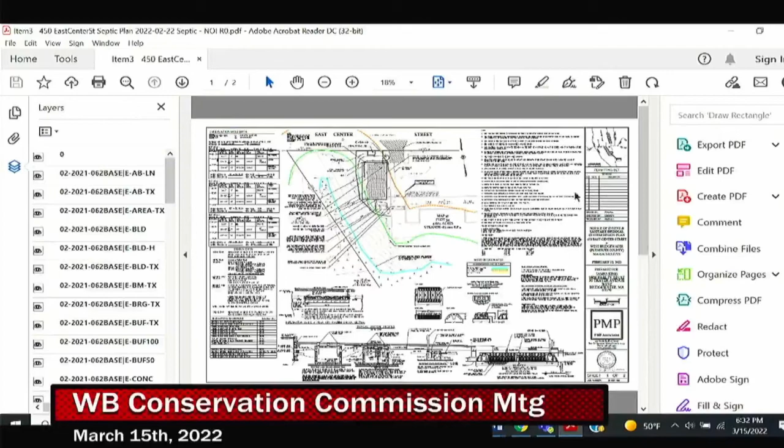Would you like me to proceed with presenting, or do you need me to present it? If you can show it, I can explain. From what I hear, sharing screen is kind of tricky. It's even tricky for me. I have much faith in you, John.

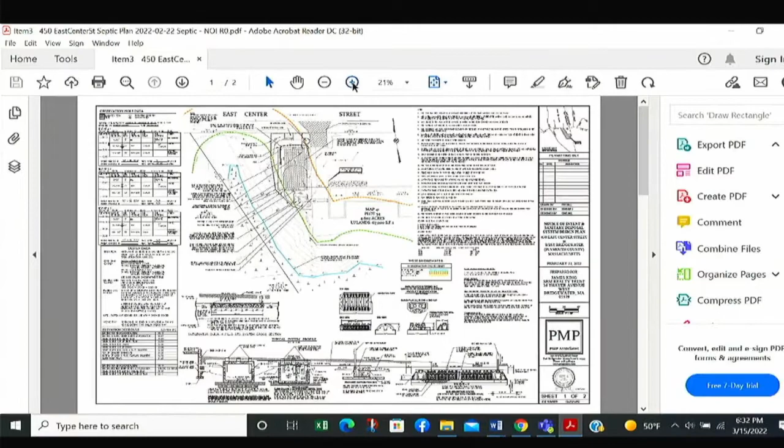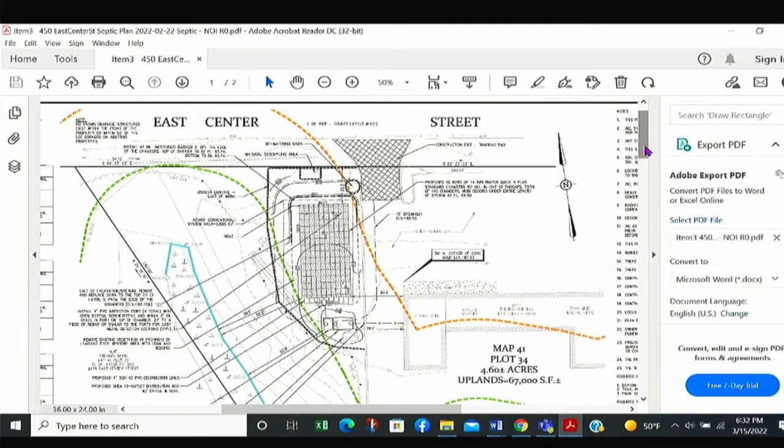Can you see it, Amanda? No, I'm not sharing it, sorry, hold on. I cannot, no. There we go. Perfect. It's all yours. Great, thank you.

My name is Amanda Langer, I'm here with PMP Associates on behalf of James King with SBM Realty to request permission from the commission to replace an existing failed septic system at 450 East Center Street in West Bridgewater. The building is a commercial building with 3 separate tenants at the moment: a general store that's been there forever, an antique store that's only there a few days a week, and a somewhat new cafe, Two Gals Grill. These tenants have long-term leases, so they will be there for a while.

The current system is failing. The owner said he has to pump it probably about every 3 to 4 weeks at the moment. So what we are proposing is to replace the existing septic tank and leaching field with a new leaching field with a geogrid, new distribution box, and a partial poly barrier, and we are going to be able to use the existing grease trap there. There is a little bit of disturbance in the 50-foot buffer, and that is just for earthwork grading purposes, so that we have enough cover over the system to avoid it failing again.

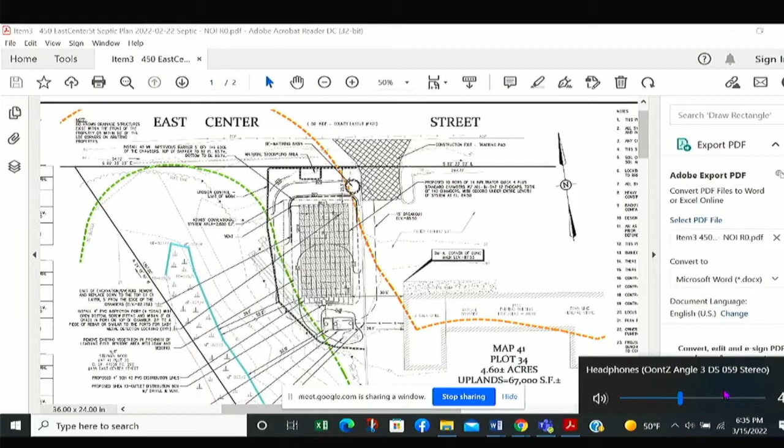Anybody else, comments, questions? I take it all these outbuildings were done long before, within the 50-foot buffer. So the question, Amanda, was the other buildings there, they were done way back and not part of this project. No. But I have no questions.

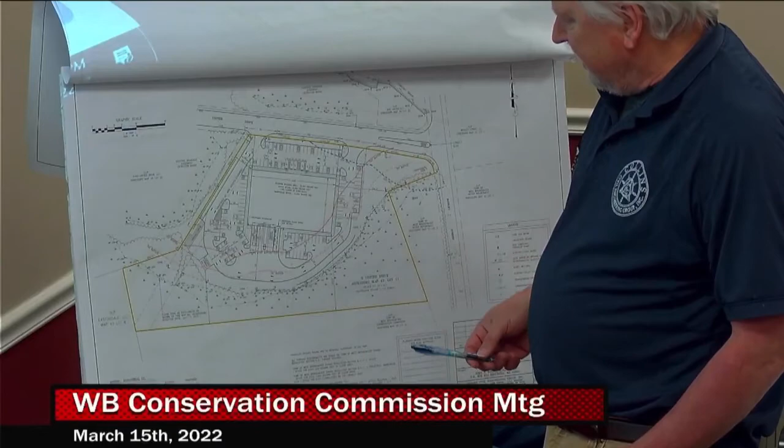We're gonna have an access drive, or an accessory building out here that's 20 by 30. It's gonna be a garage, for storage and maintenance. Nothing hazardous, nothing chemical. These guys are high tech. Things come in, they put it together, they ship it out. There's no manufacturing here, it's all high tech equipment.

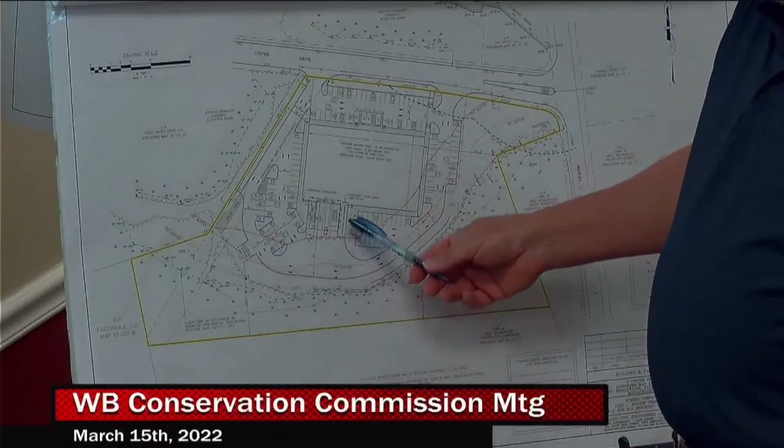We're gonna have a dumpster here, a compactor dumpster, which is outside the 100. So the things that are inside the 100 would be some of the parking. There's a retaining wall here in this dark line, and there's another retaining wall over here outside. There is a gravel drive here for access to the back. There's a basin back here, and there's an outlet pipe back here.

And this shows the proposed sidewalks that have been changed, and access doors. This pretty much is just the layout. There'll be two entrances, and they will both be for ingressing and egressing, so they can come in either way. These are large radiuses, 18-wheelers can make this very easily. The loading docks are full loading docks with a 4-foot foundation shown.

All the grading is going away from the building. I wanted to make sure that there was no puddling or icing up against the building when that happens. So they have 3 loading docks and a trash compactor. This entrance here is going to be a ramp that goes into the building, and we do propose a floor drain. There's going to be a generator over here for power in case they lose it. This floor drain will drain out to an oil water separator, which would drain into a contained vault, which will have to be maintained.

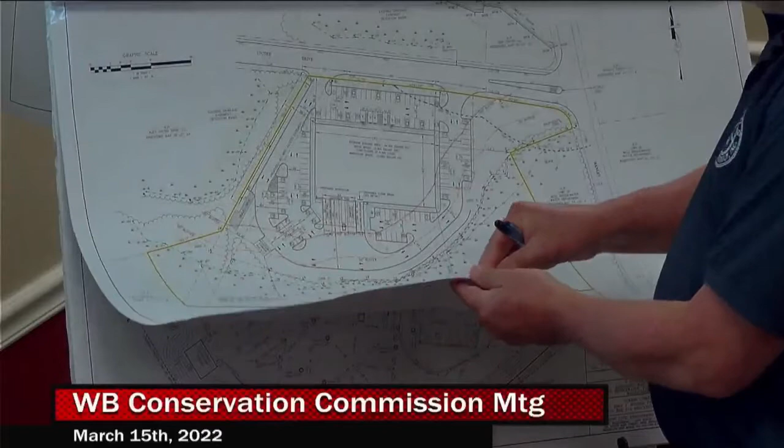Related to what was just talked about, explain again what the purple line is here. Well, the purple line is the limit of work line that was originally accepted by this commission from the granting of the land to the town from Mr. Ronald Snow, which allows work up to the purple line. Yeah, we don't go beyond the purple line. And the purple line's about 2 or 3 feet from the wetland line. The closest that we have, our siltation fence, is 5 feet from the wetland line. So we're gonna have a tiny buffer.

This is just a large scale drawing so you can see a little bit better. It shows the number of parking spaces. I don't show any of the buffer zones on here because it's mostly for layout purposes, to see how traffic's gonna flow, where things are in relationship to the proposed building itself. You can see that these LIs are all landscape islands, and there's quite a few of them.

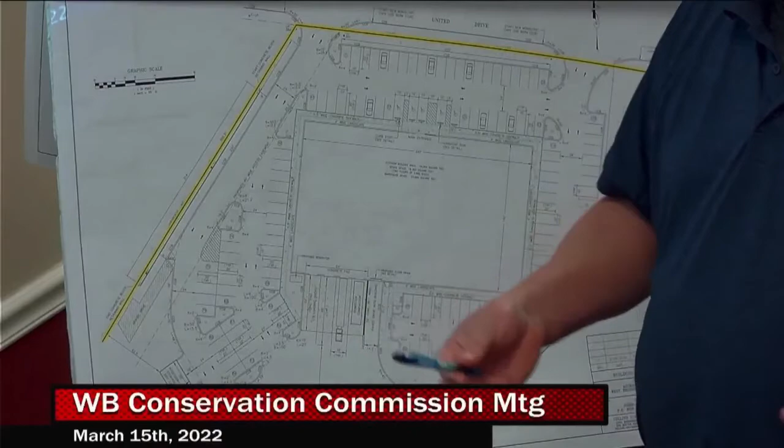We're gonna have snow removal. There's a 10-foot grass strip right along here, all snow removal. This will all be snow removal in here, and this will all be snow removal up here. There's a large amount of area that they could push snow in this area, and once it melts, it'll go through our treatment train. Where is it again? The snow removal is, there's a 10-foot strip here, and then there's a 10-foot strip that comes all the way across here.

And then this is all snow removal down to the retaining wall. And then we also have snow removal all on this side of the parking lot.

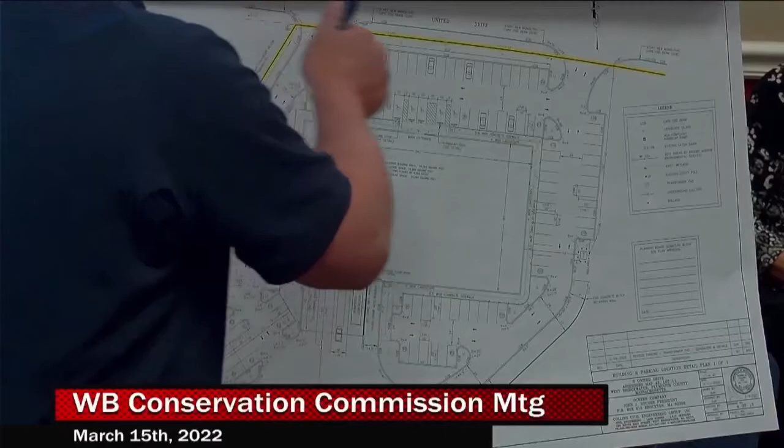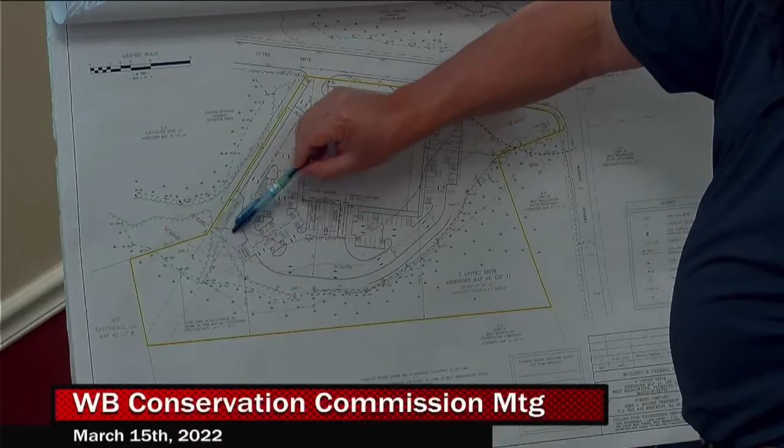How far from the purple line is that? I'll show you on this one, back on the earlier one. So our snow removal is here and here. I'd say the 10 feet is probably another 15 or 20 feet to the purple line from here, probably another 30 or 40 from here at least. Actually, this snow removal is outside the 50 right here. This is just inside the 50, so it's probably at least 15 feet or so.

They're not planning on using any chemical treatment for ice? No, there's an operation and maintenance plan required that forbids that, so no chemical treatment. No salt? No salt. What are you gonna do, molasses? Yeah, sand it.

Sand it. Were these lines, the purple, the 50-foot and everything, were you, when we said something about working up to the purple, is this before we knew what was going in there? That we said it was okay? This was an agreement between Mr. Snell and this commission. But we didn't know anything what was designed going in there. Nobody had anything designed, nothing.

So we didn't know 50-foot, 100-foot, what was gonna be in it or anything like that? No. So this is just based on the agreement that you made with Mr. Snell. The design was based on that. So there was no design prior to that. In fact, I came in a little later on the project. So really, the design started maybe a month ago, tops.

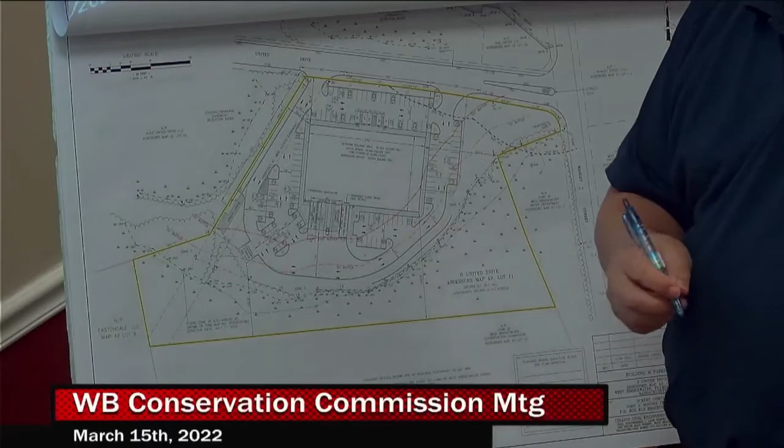The number of parking spaces - I have a calculation here. For the warehouse space, they require one space per 1,000 square feet. Office space requires one space per 200 square feet. And the highest amount of employees in the warehouse at any one time needs one space for every 3 people. So with those calculations, I have 19,360 square feet of office, that's 96.8 spaces. The warehouse is 24.7. So required is 123.5, and we have 126.

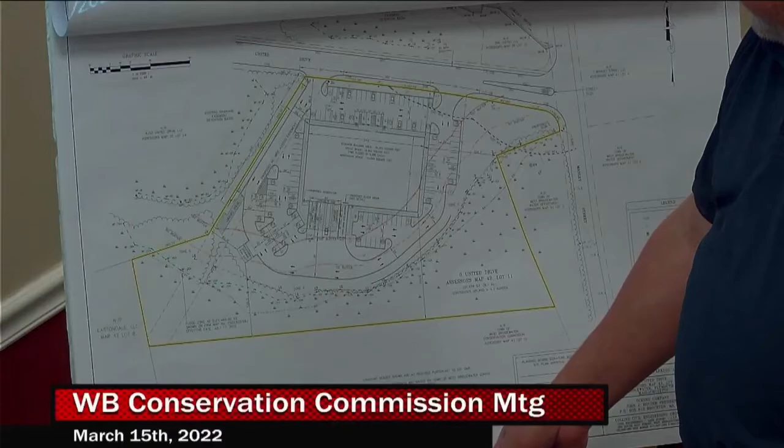Now, these numbers probably will never be met. I've talked with Mr. Hauser about when he's operating there. These are extraordinary numbers - maybe a third of the parking lot will be filled at any one time with the number of employees he has.

Have you thought of asking the planning board for a variance? I talked to Hugh earlier, and he believes that the parking requirements for office and warehouse aren't stringent enough. So yes, I've gone down that alley, and he wants the full amount.

We see an awful lot of pavement unused - that's the only reason I'm bringing it up. Well, and I'm just debating, there's an awful lot of work in the 50.

So, I have a question, David. This area over here, is this lower than your parking lot or higher? That lot will be lower than the parking lot. And what's the use of it? Well, we're already disturbing 4,500 square feet of riverfront. This is in the riverfront. Our use is going to be, let's get the gravel out of there, let's loam and seed it with permeable materials, and maybe a planting area or something. We're definitely going to put a sign there along Manley Street.

All right, so it's basically a landscaped area. It's a landscape area. That would look nice. The commission gave you the ability to use up to that purple line - that's correct. And you're going to be having some stormwater control outfalls in that area as well - that's correct - which goes right to the wetlands.

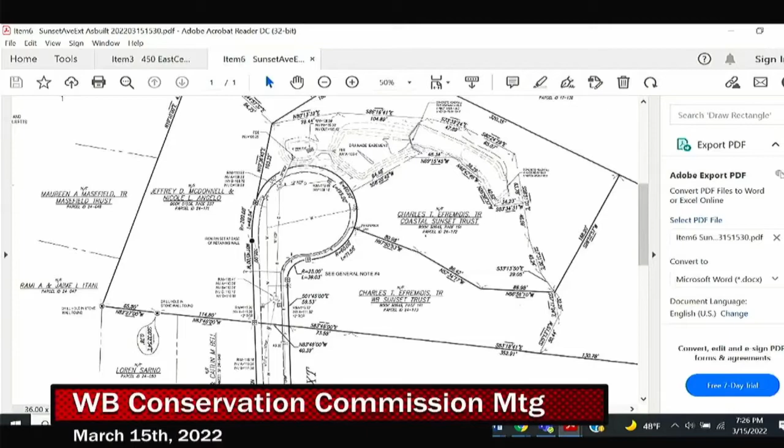The only other question I have - I went through my emails and you had sent me a picture of a hood on a catch basin. When I go out and do my photography for inspections, I try to take a picture of the catch basin with something that shows me where this is on the face of the earth, like near house number 61 and 79 or whatever. Then I shoot the catch basin - first shot looking at it from a distance, second into the catch basin.

All I had is the one you showed me in the catch basin. Can you confirm the picture of the hood is in that double catch basin? Yes, exactly. Because of the orientation of the curb on that particular catch basin, the hole in the flat top is rotated a little bit - instead of being directly in the center, it's offset a little. So you couldn't see it.

So when we cleaned it, we had the two grates off, so I had Dave snap a shot of it. The other two were a single and were in the center, so you could see the hoods real easy - I verified those. I just couldn't do that one, but again, I've been working with this gentleman and he's been very thorough and staying on top of everything.

I just needed to ask that in the public forum so that we had it on the record, David - that's why I was questioning it. So my recommendation is issue a COC on it. Any questions, comments? Hearing none, I will entertain a motion to issue certificate of compliance.